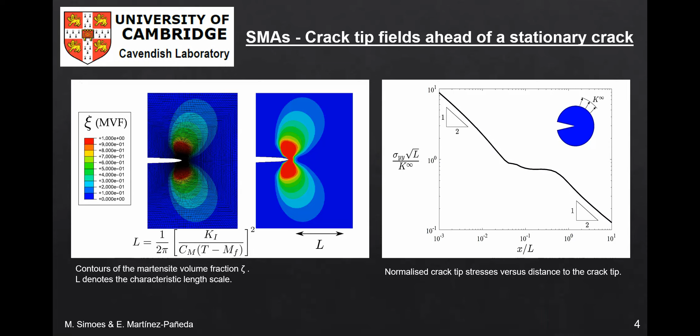Far away from the crack tip, the stresses are governed by the austenitic material properties. Then there is a transformation zone, and close to the crack tip, the material is fully martensitic. And the key thing is that this stress-induced transformation brings some toughening of the material. And we not only want to model stationary cracks like this one, but also propagating cracks due to static or cyclic loading, to capture these toughening effects and predict the structural integrity of these alloys.

So let's start with the phase field paradigm that is becoming very popular in many areas. We all know that from a computational or mathematical perspective, tracking the evolution of interface boundaries is challenging. The idea behind phase field methods is to use an auxiliary field to follow interfaces implicitly, so to say, in the sense that we no longer have a sharp interface, but the auxiliary variable called phase field or phase field order parameter, which tells us where the interface lies.

So for example, in the case of fracture applications, the phase field can take a value of 1 in the cracked phase and of 0 in the undamaged material points, varying smoothly in between. The temporal evolution of the phase field variable is then described by a differential equation that can be easily solved using standard numerical methods, making the tracking of evolving interfaces computationally tractable.

The method was first developed in the microstructural evolution community, where the change in shape and size of microstructural features, such as grains, can be predicted by defining the evolution of the phase field in terms of other fields, such as temperature, through a thermodynamic free energy. While in fracture mechanics, the application that I will be mainly discussing, the phase field tracks the crack-solid interface, enabling the capture of complex cracking morphologies. You can see in the figure examples of crack merging, nucleation from arbitrary sites, branching. So it is a very powerful tool from a computational perspective.

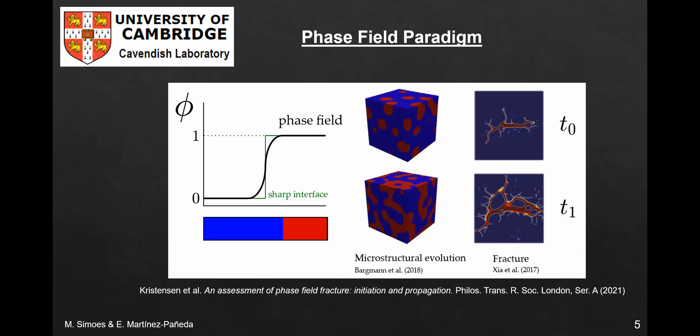So at this point, you might say, okay, all good on the computational side, no issues dealing with evolving interfaces such as cracks. But when do those cracks propagate? Or in other words, what differential equation do you use to evolve the phase field? Well, one of the nice things about phase field models is that they provide a computational framework for Griffith's energy balance. Griffith, one of the fathers of fracture mechanics, postulated that a crack would grow if the energy released by the solid reached a critical value, the so-called critical energy release rate or material toughness, GC.

This energy balance is the result of considering, in a thermodynamics context, the work required to create two new surfaces. One can formulate Griffith's energy balance in a variational form, with the first term accounting for the stored elastic energy in the solid as given by the strain state, and the second term characterizing the fracture energy, the energy dissipated by the formation of a crack.

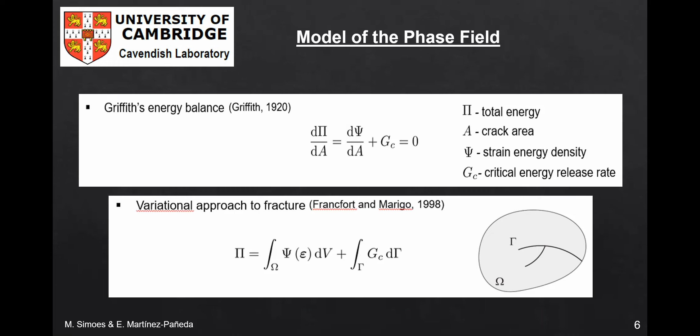Therefore, crack nucleation and growth can be predicted naturally without ad hoc criteria as dictated by the minimization of this energy conservation statement. However, minimization of the Griffith functional is hindered by the fact that the crack surface gamma is unknown. And here is where the phase field paradigm comes to our rescue, because we can use the phase field as a marker, transforming the surface integral into a volume integral, enabling us to solve this global minimality problem.

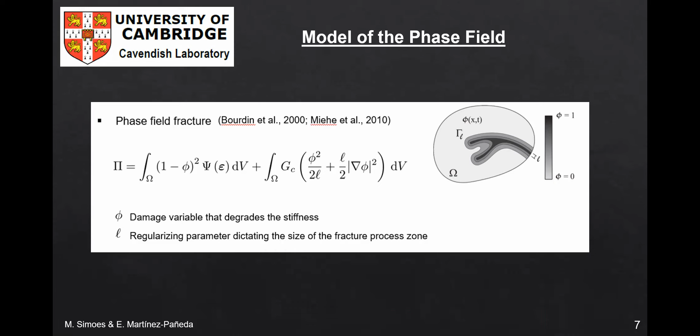Two things that I want to emphasize here. First, following standard continuum damage mechanics arguments, the phase field can be thought of as a damage variable that goes from 0 in intact material to 1 for fully cracked material points. And as a consequence, by increasing its value, it reduces the stiffness of the solid, as you can see in the first integral. Secondly, there is a gradient term and consequently a length scale. The model is non-local, which ensures mesh independence. Results are mesh independent as long as the length scale is resolved.

So at the end of the day, we have a model that is physically sound, based on Griffith and in the thermodynamics of fracture, and at the same time, computationally very compelling. You can get a good overview by looking at the balance equations. The first equation is the solution to the deformation problem, the standard balance of linear momentum with the phase field degrading the stiffness of the solid. And the second equation is the phase field evolution, sort of a competition between the strain energy density of the solid that increases with mechanical straining and the toughness, a material property.

So just by solving this simple system, we can predict in both 2D and 3D very complex cracking patterns, such as branching, merging, initiation from arbitrary sites, complex trajectories, and all these without convergence issues or the need for remeshing. You can see some examples in the slide.

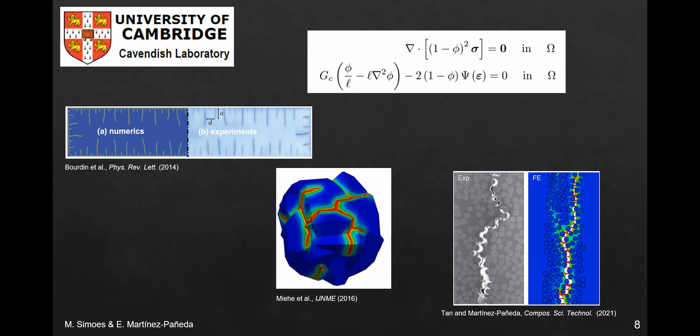And what we have done is to propose the first formulation of phase field fracture for shape memory alloys. And there are two key elements in our formulation. One is that the toughness of the material can be made dependent on the martensitic volume fraction. We know from experiments that the toughness of the martensite and the austenite phases can be quite different. So we believe that it is important to have this heterogeneous fracture energy. And we do so by using simple homogenization.

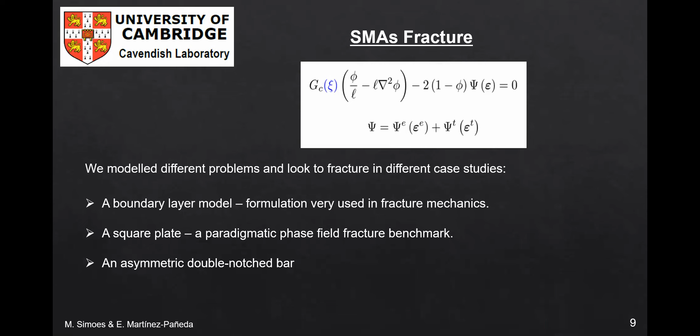The second element is the fact that the driving force for fracture is not just the elastic strain energy, but we also consider the contributions from the transformation strains. And we implement these numerically into finite elements. I'm going to show some representative examples of 3 boundary value problems where we model crack propagation with this formulation. The first one is a boundary layer model that is widely used in fracture mechanics. Then we model a square plate with a crack, a paradigmatic benchmark in phase field fracture, and finally, I will show an asymmetric double notch bar.

For these numerical experiments, we have coupled our new phase field fracture formulation with the unified model from Lagoudas and co-workers to capture the constitutive response of shape memory alloys. In the left table, you can see the shape memory alloy material parameters that we use. We model a nitinol, following the experimental data provided by Strnadel et al. A uniform temperature of 320 Kelvin is adopted following the experiments, but its influence is investigated and the model can be used with varying temperature.

In the right figure, the comparison between the calibrated model predictions and the experimental data from the uniaxial tension tests is shown, and we observe that the smooth hardening capabilities of the model enable attaining a very good agreement with the experiments.

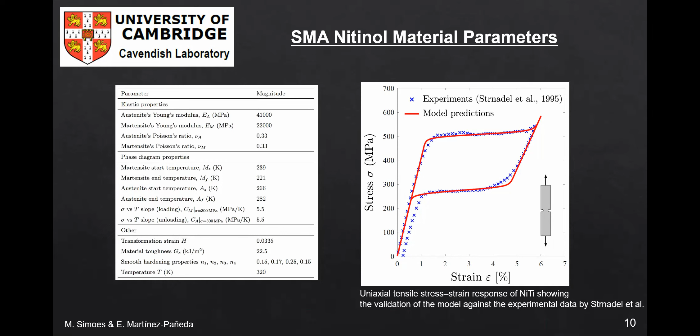So the first boundary value problem is what we typically call a boundary layer formulation. And our goal is to compute crack growth resistance curves, or so-called R curves. The concept of a boundary layer formulation is illustrated here. For a cracked solid, the crack tip stress state is characterized by the stress intensity factor KI, assuming mode I conditions. So we prescribe a specific stress intensity factor by modeling a circular region and prescribing in the outer boundary the displacements according to the Williams elastic solution. Remember that the high stresses near the crack tip will trigger a phase transformation, but as long as this transformation zone is small, this approach can be used.

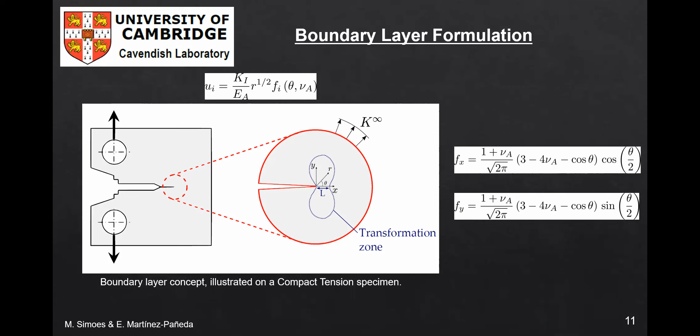So we use this boundary layer formulation to apply a remote load as characterized by the remote stress intensity factor KI, and to compute the crack extension delta a using our phase field formulation. This gives us crack growth resistance curves. The results shown here analyze the influence of, in A, the phase field length scale, in B, the toughness definition, in C, the crack density function, and in D, the temperature. In all cases, the model predicts a toughening effect, a rising R curve, that is associated with the energy dissipation due to phase transformation, as observed in the experiments.

In A, we see that when we lower the phase field length scale, which is equivalent to raising the material strength, we get a higher R curve. In B, we see a significant difference between assuming a homogeneous toughness or making the fracture energy dependent on martensite volume fraction by using the rule of mixtures. The martensite phase has a smaller toughness, so cracking initiates before.

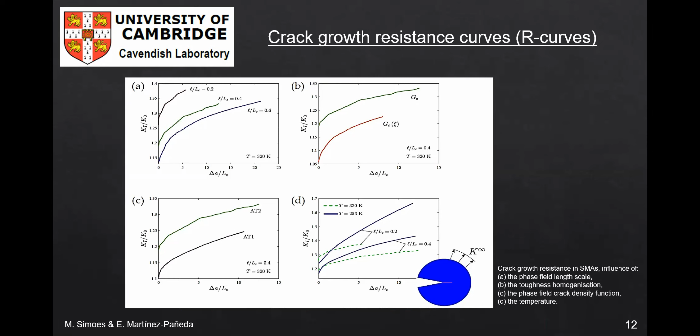In C, we show that the so-called phase field AT1 model leads to less dissipation relative to the standard phase field AT2 model. And finally, in D, we evaluate what happens at a temperature below the austenitic start temperature, such that no reverse transformation takes place upon unloading. We see more dissipation at smaller temperatures as the transformation stresses are smaller.

Here, failure of a cracked square plate subjected to tension is analyzed. The results obtained are shown at the right in terms of the force versus displacement response, with the contours of martensite volume fraction and the phase field fracture parameter, phi, at different stages embedded in the figure. Differences from the response commonly observed in this classic benchmark are notable.

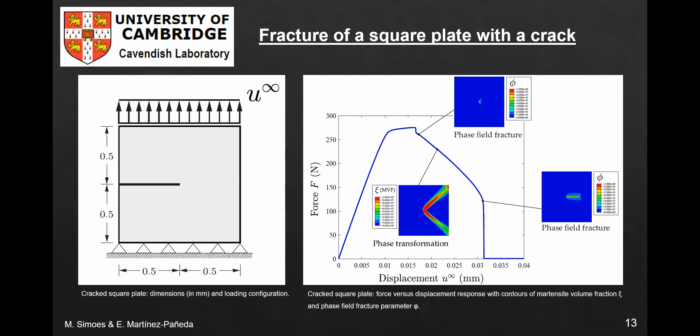We all know that in a linear elastic homogeneous material, the plate fails in an unstable manner, with the force versus displacement curve showing a very large drop immediately after reaching the peak load. However, in this case of shape memory alloys, a significant toughening effect is observed, and there is an initial drop in the load associated with the first instance of crack growth, but then the crack progresses in a stable manner until complete failure of the sample. The toughening effect observed is related to the energy dissipated due to transformation.

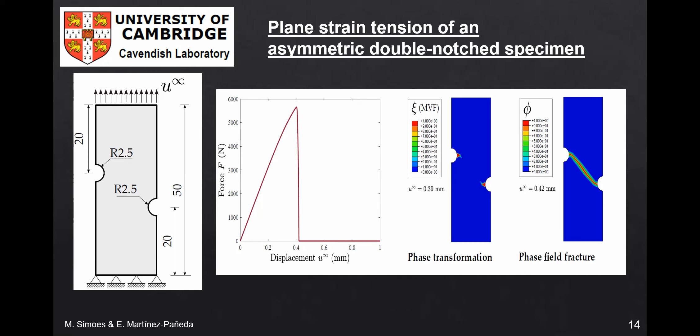An asymmetrically notched plane strain bar is investigated here to model mixed mode fracture and crack coalescence. The results are shown on the right. Contrary to the response observed in the previous slide of the square plate, a sharp drop in the force versus displacement curve is observed, which is indicative of brittle fracture with little inelastic dissipation. The inelastic region is confined to a small area in the close vicinity of the tips of the notches. No inelastic or shear bands are observed, such that as soon as cracking initiates at the notch tips, the cracks coalesce and unstable cracking is observed.

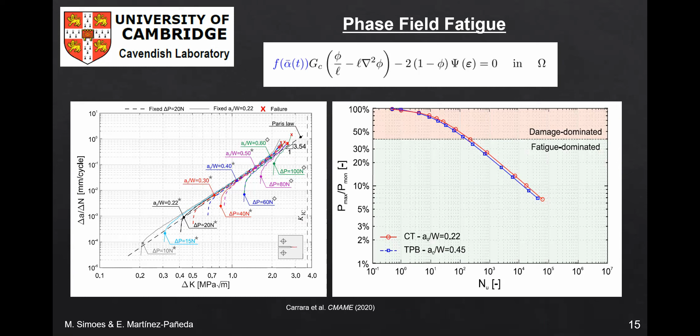So let me now show you some fatigue results. Phase field fracture models have also been extended to model fatigue crack growth. The idea is to define a fatigue degradation function that reduces the toughness of the material with increasing number of cycles. And the beauty of it is that well-known fatigue behavior, such as Paris law or SN curves, can be predicted by our model. So they are an output of the model, not an input, as it is typically the case.

So now I'm going to demonstrate the capabilities of our modeling framework in capturing fatigue crack growth by simulating cyclic damage in a stent, which is a paradigmatic application of shape memory materials. This case study also serves to showcase the computational efficiency of the framework and its applicability to the modeling of computationally demanding large-scale 3D boundary value problems. So stents are small cylindrical tubes that are placed into blood vessels, arteries, or other ducts to hold the structure open. Nitinol is a popular material choice in stent manufacturing due to its biocompatibility and capacity to expand by recovering its elastic deformation after the constraining delivery system has been removed.

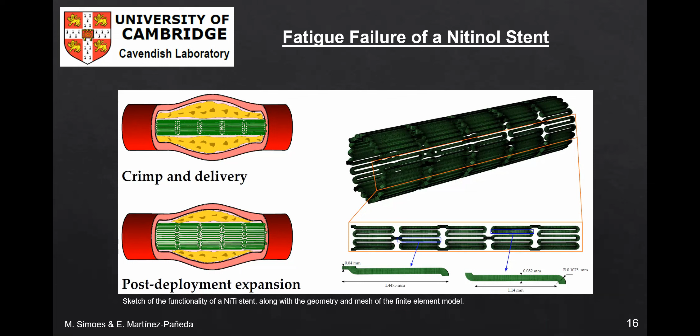However, fatigue resistance is often the limiting design criterion, since the stent is subjected to repeated contraction and expansion during the systolic and diastolic cycles. Current fatigue design models for stents commonly use Goodman's and other empirical methods to estimate the number of cycles to failure by extrapolating from the stress-strain state of the first cycle. We aim here at providing a more mechanistic approach using a phase field fatigue framework that can predict features such as SN curves or the Paris law as a natural outcome of the model.

The finite element results obtained are shown here. The figure at the top shows the deformed shape of the model during the 4 stages of the analysis, the crimp and expansion stages of the deployment phase, and the systolic compression and diastolic expansion stages associated with each pressure cycle. A significant amount of damage occurs during deployment, but no cracking is observed. This is also the case for the phase transformation. Most of it takes place during the deployment phase.

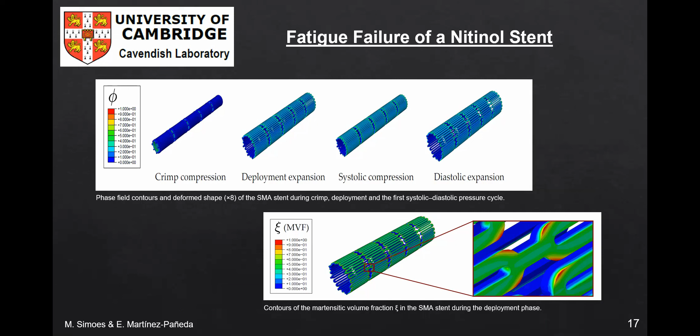In the bottom figure, the contours of martensite volume fraction at the end of the crimp expansion deployment process are shown. The martensite volume fraction contours show that the martensite phase is localized in the edges of the stent struts. This is also the location where cracking initiates. While the phase field reaches high values during the deployment stage, 29 cycles of compression expansion pressure are needed for cracks to initiate. These surface cracks initiate in the regions where phase transformation took place during stent deployment. The crack region, phi = 1, extends with increasing number of pressure cycles. And after 50 cycles, it has extended over a significant part of the stent, including the bridging areas between struts.

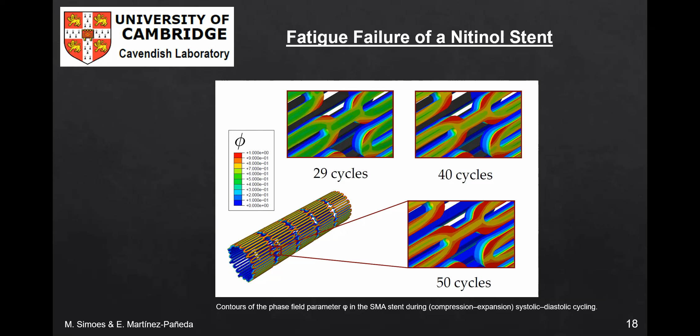So in summary, the example demonstrates that the framework presented here can be used to estimate the lifetime of medical stents for arbitrary geometries, boundary conditions, and material properties. So I will conclude by saying that we have presented the first phase field fracture formulation for shape memory alloys. The model can capture both fracture and fatigue damage and includes the main features inherent to the constitutive behavior of shape memory alloys. We have demonstrated the potential and the robustness of the computational framework by addressing several paradigmatic 2D and 3D boundary value problems involving subcritical crack growth, unstable cracking, crack coalescence, and fatigue crack growth of a nitinol stent.